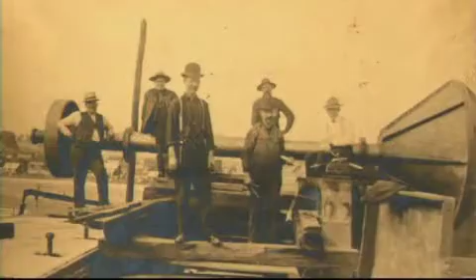Our company was founded in 1892 by Samuel Robinson, an immigrant who had been a master mechanic for a coal company in England. After arriving in this country, he began working for the Pittsburgh Coal Company as a designer and eventually advanced to plant superintendent.

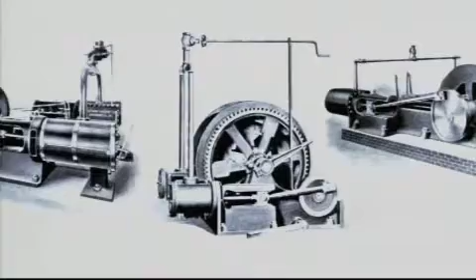During his time there, Robinson devised and implemented a number of improvements in coal handling equipment. Later, Samuel's son, J.R., a mechanical engineering graduate of Cornell University, joined him in working at the company.

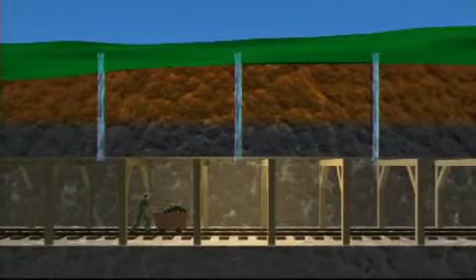At the time, the mines were using only natural draft ventilation, which allowed air in through holes drilled in the surface above. However, because the methane gas in the mines was too heavy to rise, it would accumulate beneath the ground and often cause dangerous explosions. J.R. Robinson solved the problem by inventing an air-moving device that forced out the gas.

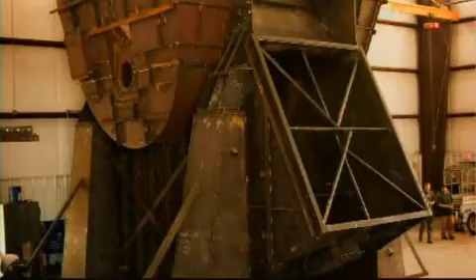That was only the beginning. Since that time, generations of the Robinson family have expanded the operations of this company, which now designs and builds pre-engineered and custom-designed heavy-duty industrial process fans for the power generation, steel, cement, coal, chemical, fertilizer, mining, thermal treatment, and pollution control industries.

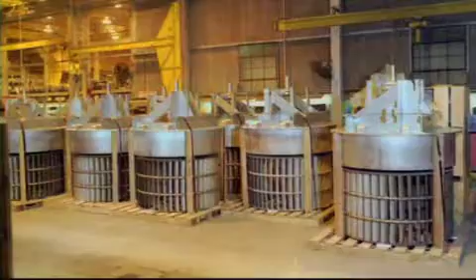Robinson Fans now operates out of 4 strategic locations: Zelienople, Pennsylvania, Lakeland, Florida, Salt Lake City, Utah, and Abilene, Texas. We manufacture new fan products and offer complete repair and replacement service for the existing fans of any manufacturer. At Robinson Fan Service and Equipment Company in Trussville, Alabama, we provide on-site repair services. Robinson Fans also has independent manufacturer sales representatives located throughout the United States and internationally.

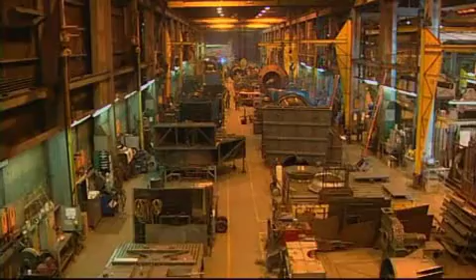Robinson Fans Quality Management System is certified to ISO 9001-2008 standards. At Robinson Fans, we are in a constant state of evolution as we continue to develop new products and improve upon existing applications. Our dedication to consistently providing products and services that exceed our customers' expectations helps us attain our goal of 100% customer satisfaction. Now let's take a tour through our Zelienople facility, where you'll see the meticulous processes that help us achieve that objective.

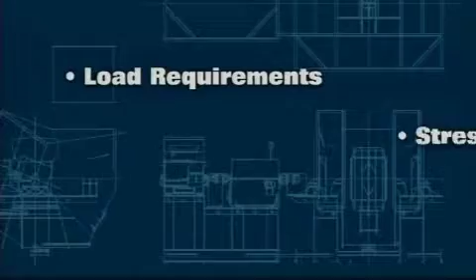Because all businesses, facilities, and situations are different, our sales and engineering teams assess each customer's individual needs and custom design a fan for an application to meet them. Among the many things that will influence the design of its components are the load requirements, stress factors, and environmental conditions in which the fan will be operating.

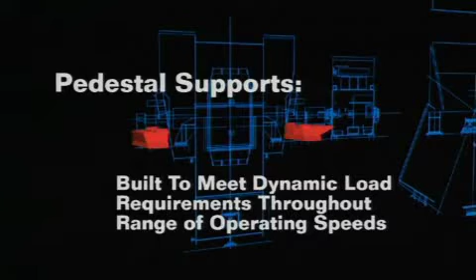The fan rotor stresses are determined by finite element analysis and thermal effect analysis. We design the shaft according to stress, rapid temperature change, and critical speed considerations. Pedestal supports for the rotor and shaft assembly are built to meet the dynamic load requirements throughout the range of operating speeds. Our fan casings are designed to accommodate the forces from thermal, structural, and dynamic loads. Bearings are selected for each specific application.

We also provide our customers with recommendations on structural foundation and soil stiffness requirements that must be met in order for our equipment to operate as intended.

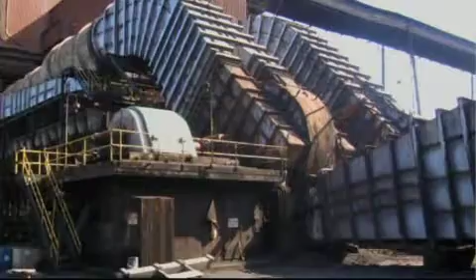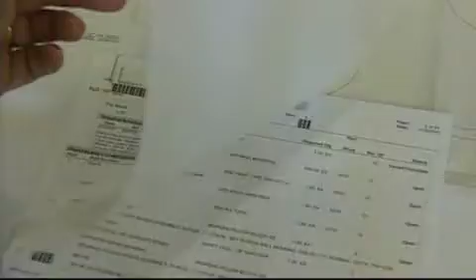As part of our personalized service, we assign a project manager, who is the customer's main contact until the job is complete and the product shipped. To assure quality and accuracy, we create a document known as a job traveler, which contains specific instructions for every stage of the manufacturing process, as well as the quality control requirements.

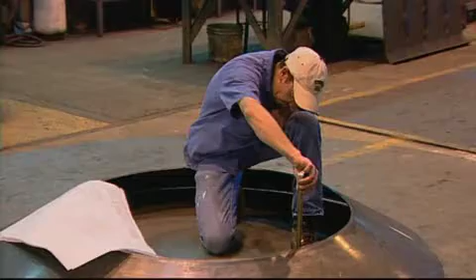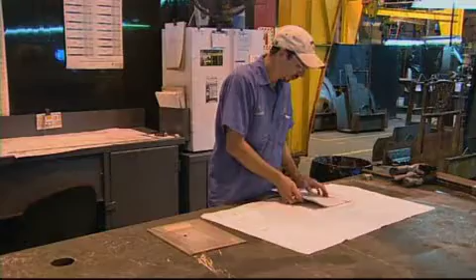The job traveler accompanies the work order on each step of its journey through our plant, as the fan goes from drawing to completion. As the job traveler and the customer's order traverse each department and quality control checkpoint, the employee performing the work and the process supervisor must sign off on the completed process before it moves on to the next process.

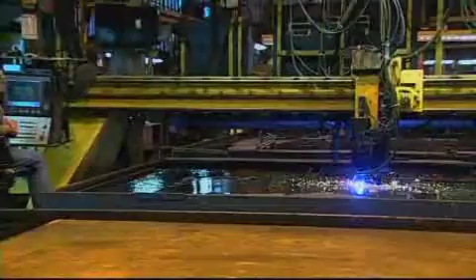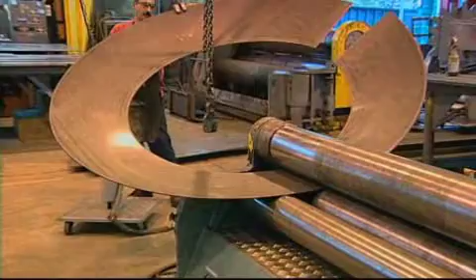The computerized nests for components that will be fabricated are sent to our burning machine operations, where, after reviewing the instructions, dimensions, and material requirements, our technicians will burn the components to the specifications. All of the components are labeled with the job number and then sent to the layout department for forming and fitting before the welding process begins.

Our facility includes heavy-duty cranes, which range in capacity from 5 tons to 50 tons. We also have many jib cranes to provide safe and quicker operation at individual process stations.

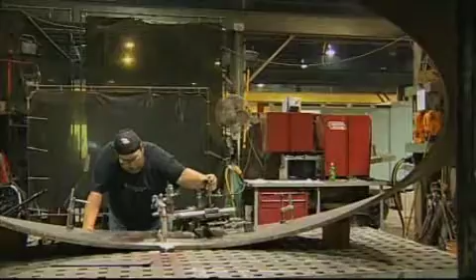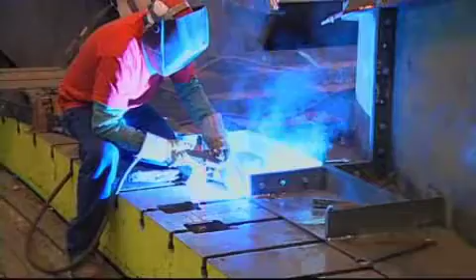Our welders of rotating parts are certified to AWS D14.6 specification for welding of rotating elements of equipment. Our welders of stationary parts are certified to AWS D1.1 procedures, and our quality control inspectors are qualified to Robinson written practice for rotors and stationary components.

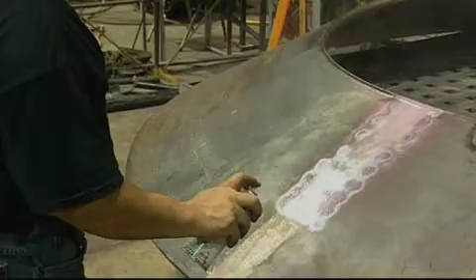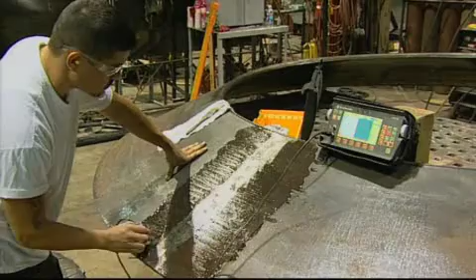The rotor butt welds then undergo ultrasonic or radiographic inspections as required by our engineering standards or our customer specifications. We also perform visual and dimensional inspections before the rotor is balanced.

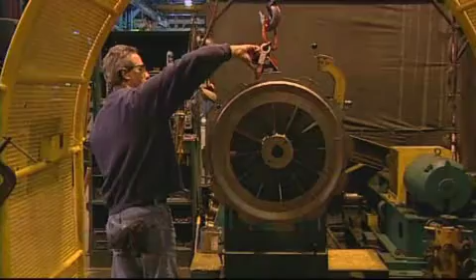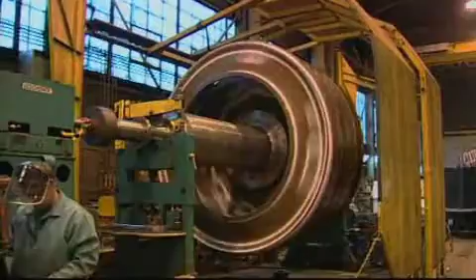Rotors and shaft assemblies are dynamically balanced on our Schenck balancing machines to ANSI S2.19 grade G2.5 standards. These machines can accommodate rotor assemblies of up to 180 inches diameter and 100,000 pounds.

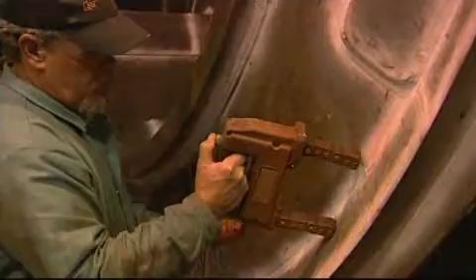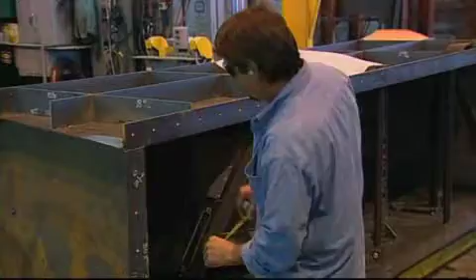Depending upon the material from which they're constructed, other rotor components will have ultrasonic, radiographic, magnetic particle, or liquid penetrant inspections. Stationary parts also receive visual and dimensional inspections after welding.

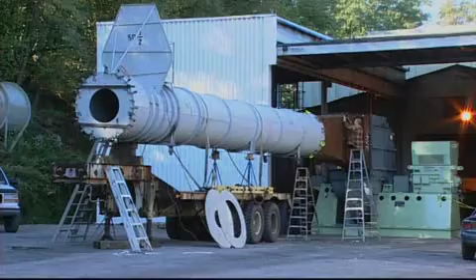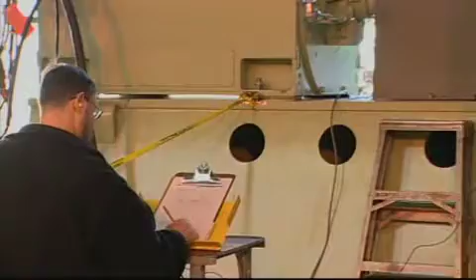In our state-of-the-art laboratory, our research group performs air performance and sound testing for all product designs before introducing them to the marketplace. We are a charter member of AMCA International, and all tests, whether full-scale air performance tests or model application tests, are executed to AMCA Standard 210.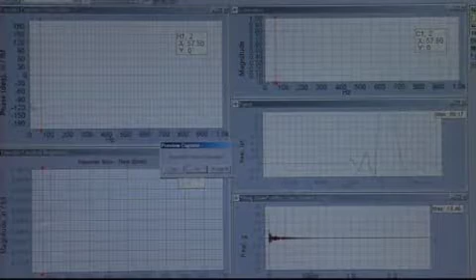In many cases, we also perform a critical non-destructive test that determines the natural frequency of each component to ensure that the rotor will operate safely within the RPM speed envelope for the application.

Our lab and engineering service group has the capability to provide computational fluid dynamic modeling for customer applications to optimize the system's connections to the fan, which optimizes energy savings.

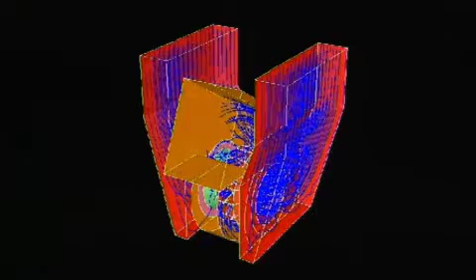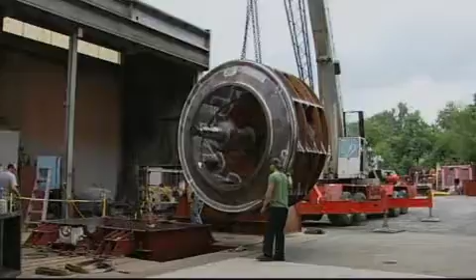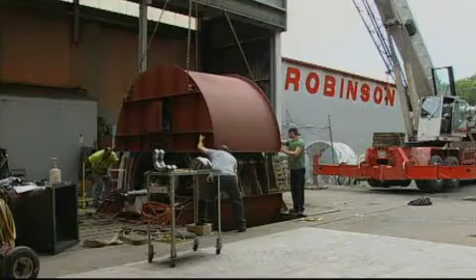When an overspeed test is needed, it is performed by several technicians who install the rotor assembly in our laboratory test enclosure, which is designed to reduce the power consumption at a specified overspeed requirement. This test will verify the structural integrity of rotors rated up to several thousand horsepower.

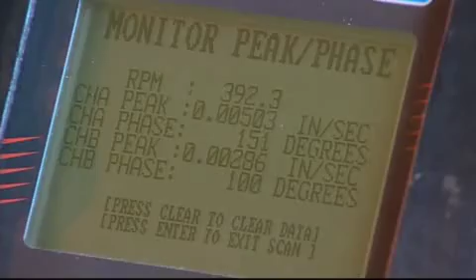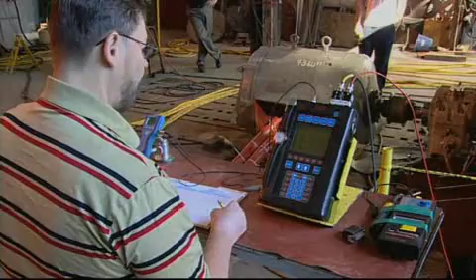During the test, the technicians monitor and record the fan's speed, power consumption, bearing vibration and temperature, circulating oil or water temperature, and the internal pressure and temperature of the test enclosure. Once the fan reaches its test speed, it is locked in to run at that speed for an agreed time duration.

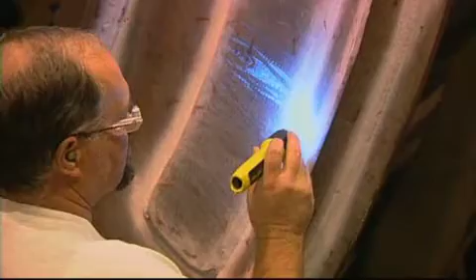After the testing is completed, the rotor assembly welds are re-inspected with the same non-destructive methods used before the overspeed test to confirm that they meet all of the welding quality requirements, and the results are documented. The unit then goes through the final inspection process and is prepared for shipment.

Relationships with our customers are important to us. We encourage you to visit our facilities. Your visit may be during the design and fabrication of your specific order, or just a general visit. Our inspection and testing processes are documented and copies are available upon request. We also ask that you visit our website for application and product information. We consider each customer order an opportunity to meet our commitment of customer satisfaction.